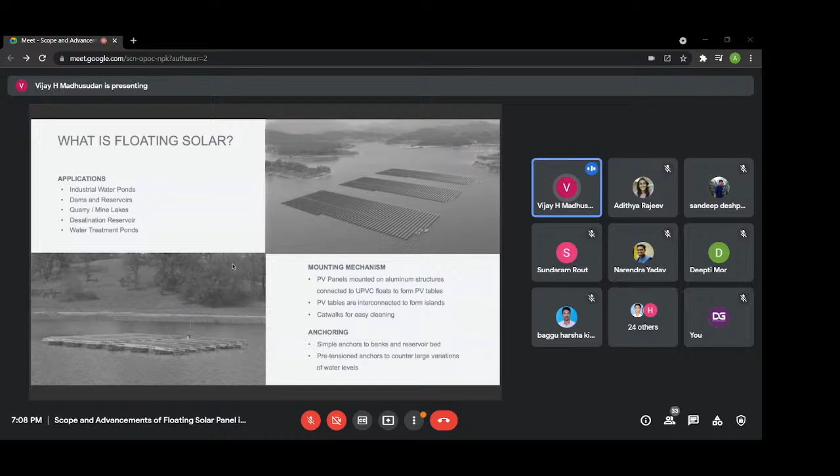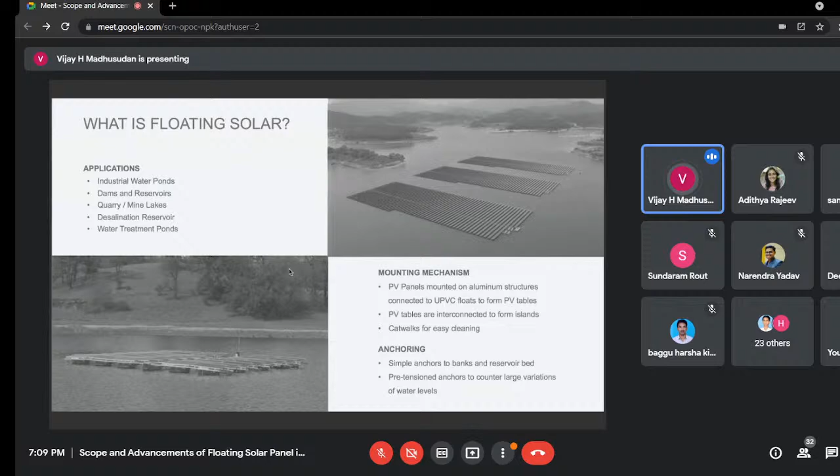So the first fundamental thing that we will understand, and I think most of you would know, is what is floating solar. Floating solar, as the name suggests, is any solar power plant that is installed on water and is floating on it. It's as simple as that. Applications are varied. You can have it installed on industrial water ponds, dams, reservoirs, lakes, water treatment ponds, and a whole lot of them. Right now, people are trying to install floating solar on backwaters in the harbor where you have backwater lagoons, and within coral reefs where you don't have too many waves and tides.

And the primary reason is because two-thirds of our world is covered with water, and people are always running after the little bit of land that they can have, right? With the increasing population, the pressure on land is increasing, which is why we are looking at alternate land neutral technologies for solar. And why solar? Purely because it is a renewable technology, and that is the way forward in trying to make things green.

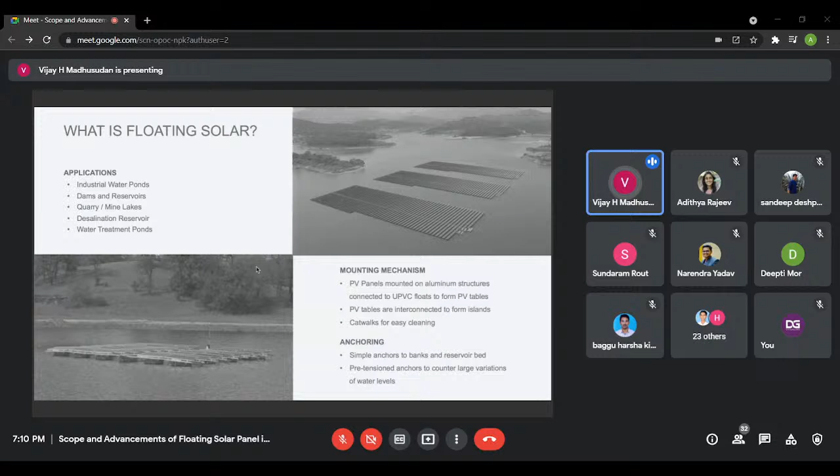So, typically, the advantages of floating solar are a multitude. When you're installing floating solar on raw water ponds or drinking water reservoirs, you have water conservation in the sense of reduced evaporative losses. As I mentioned earlier, it's a land neutral technology. It increases the utilization of unusable space, which is the water surface itself. Typically we design this system for about 25 years. It's fairly low on maintenance because places around water bodies are mostly dust free, and the biggest maintenance on solar panels is cleaning the panels themselves.

Then it is eco-friendly. Most systems today are designed with aluminum, HDPE, UPVC, and other recyclable material that can be recycled after 25 years. It improves your plant utilization and reduces algae growth because it provides a shade cover on the water. And it also provides a low cost energy storage solution, which is one of the most interesting things about floating solar, which I'll tell you about towards the end of the presentation.

A few considerations while doing a floating solar installation: the system should have a low tilt angle, purely because you would not want the system to start drifting because of large wind speeds. Then we need non-slippery systems, so that it is easily accessible and serviceable. Ease of installation is important, and one of the biggest advantages is cooling of the solar panels, which enhances power generation.

So these are predominantly a lot of advantages that's packed in one single solution. So typically the components of floating solar solutions is as in this diagram. So first you have a structure, a floating structure. It can be made in a multiple number of ways, with floats typically on which you have modules installed,

and then this entire island, floating island, is moored and anchored to the bank or the bed of the reservoir or the lake. And then we can have floating inverters on the bank with cables running, either DC or AC power cables running to the substation.

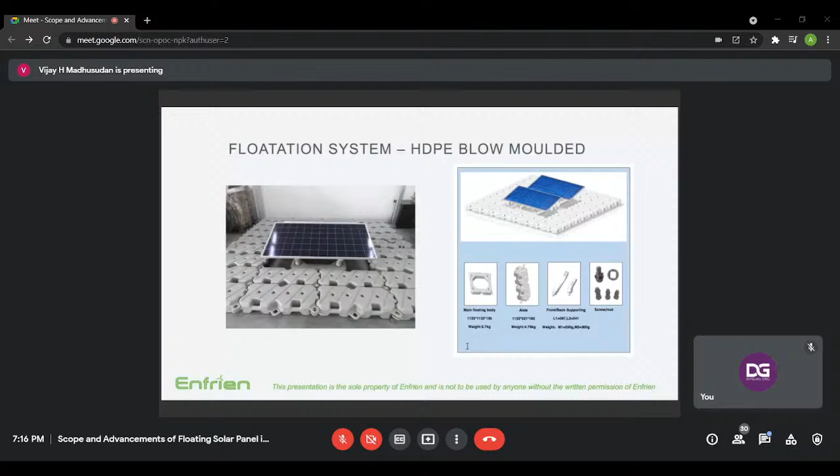So typically, the floating solar system has a main floating body which houses the panel. Clipping mechanism can be different with different manufacturers, and again a buoy which will act as the aisle. The aisles, or catwalks is what I would say, are required for people to actually move on the island and actually service and maintain the system. And again, you have screws and nuts which actually fasten each of these components together.

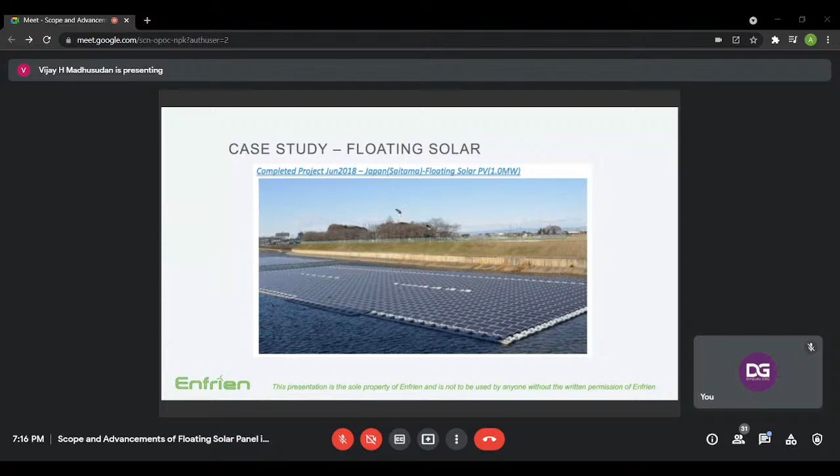So this is one of the projects that they had completed with the same system that I had shown earlier. It's not us, but it's our partners. So this is in Japan, this is in Thailand. So you can also see that cables are actually laid on a floating pontoon that's created over here. And these are all megawatt scale installations that you see.

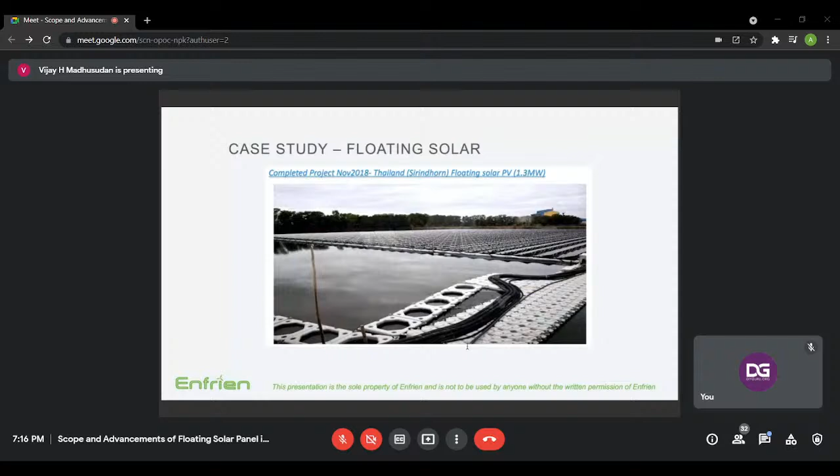So typically we do not advise covering the entire water body with floating solar panels purely because it kills the ecosystem in the water. So we take a maximum of 25% coverage. Then you need to look at the available water levels, at the lowest water level recorded across, let's say, 25 or 30 years, because once the water dries out, you still need the system to be floating.

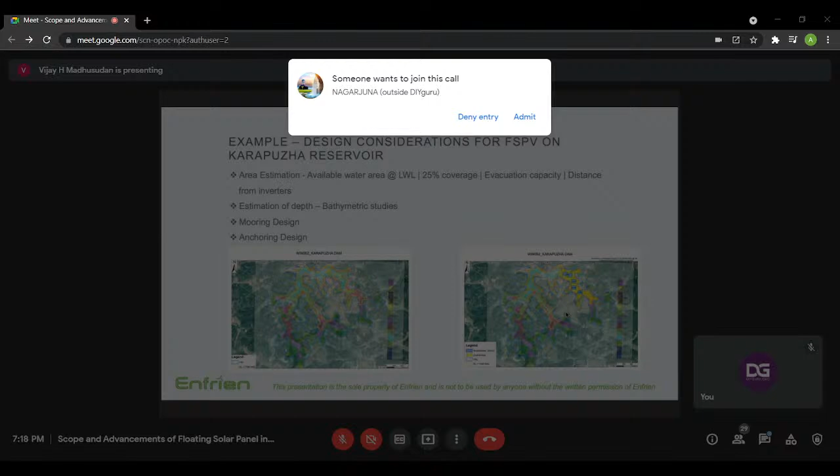Sir, there are some doubts here. Shall I read it now? Yeah, you can. So, Nehim Maskar had asked, will the system affect the river creatures? And I guess you answered it already. And the next is from Adul Kumar. Panels used are mono or poly?

You can use any panel. Typically, my recommendation would be use monocrystalline panels with the highest efficiency, because the mounting cost is extremely high. So a comparison is, let's say, a megawatt of mounting system for ground mount would cost about 20 lakhs upwards, let's say 15 to 25 lakhs, and a megawatt of floating solar system can cost anywhere from 75 lakhs to about a crore and 25 lakhs. So the lesser area the panel has, or the more efficient the panel is, it's better for the project costing itself.

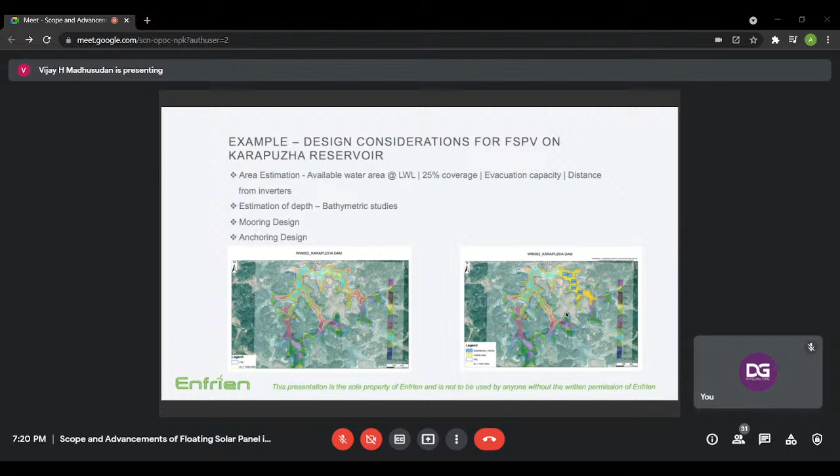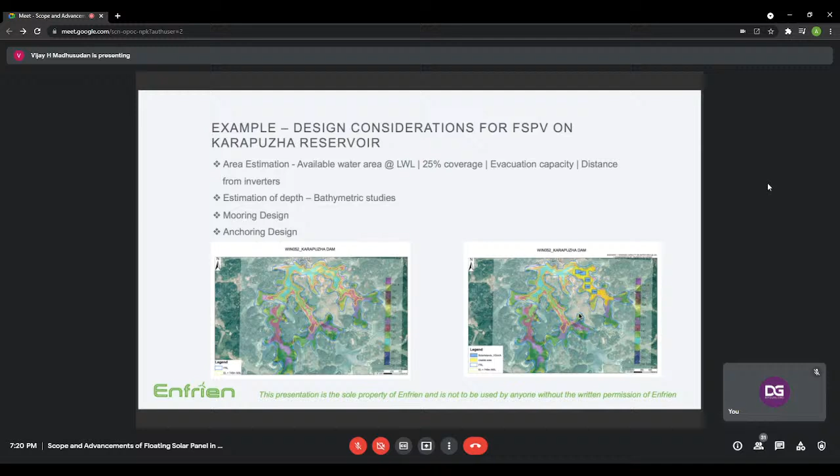Any other questions out there? Yeah, sir, one more is there from Harshit Takral. So, what is mooring and anchoring design? I'll just go to that in the next slide. So basically, mooring is the technology on how you hold the entire island together. So the left image that you see over here, there is a plate which is connected to a chain, which is again finally anchored onto the bank. This is the system that is used to anchor the system.

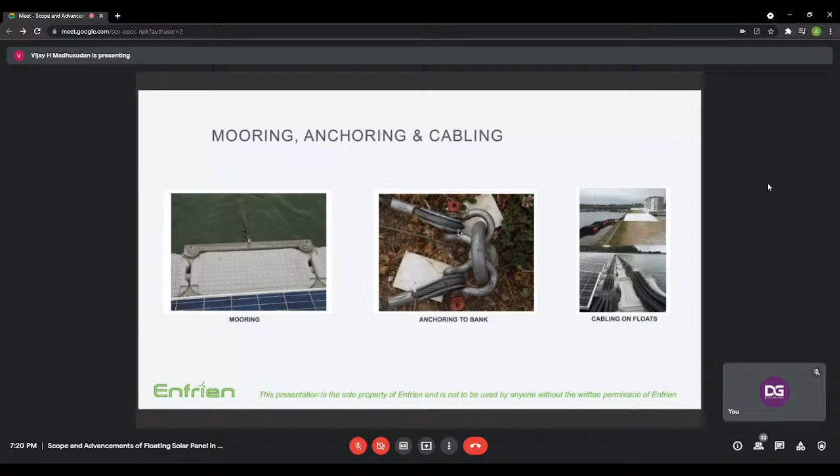These are the hooks and the cables used to anchor the entire island onto the bank. So mooring is typically on how you handle the overall island, and anchoring is to make it stable and connected to the bank. And again, this is cables on floats, which are shown on the right side image. Sorry. Yeah. So this is the technology that we have been developing,

which is Naavi itself. So we started developing this in 2016, and we have had multiple iterations. We started with using HDPE and blow molding itself. Then we realized that it is not proven to last more than 20 years, and in 2016, the oldest system was only 6 years old. So we started evaluating various other options. So we started our design using UPVC, because UPVC is used in the construction industry and it has a life of over 30 years.

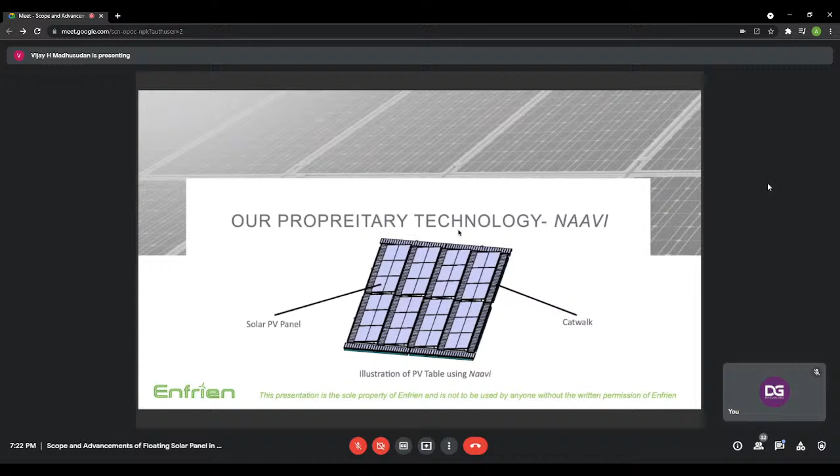UPVC cannot be blow molded. So we have designed a system which can be extruded and welded to create the buoys, the floats itself. So in our system, we have tried to make it modular, keeping the flotation system separate, the structural supporting system, which is made of aluminum, separate, so that you can have your desired angles, and also the catwalks and walkways different. So these are the typical components that we use in our system which we have designed. It's being commercialized. This is something that's been developed for the last 3 years actually.

So quickly, moving to the opportunities in India. The largest project installed till date is 25 megawatts in NTPC Simhadri, I think a couple of months ago. They have done this in association with BHEL, with HDPE blow molded floats. There are a whole lot of projects coming up. The potential in India alone is 280 gigawatts, because we have 18,000 square kilometers of water bodies within India. A few of the larger projects is 150 megawatts in Rihand Dam.

It's an ongoing project taken by, I think, Shapoorji Pallonji at 3.36 rupees per unit, which is still pretty low, but about 30% or 40% higher than a land mount system. And there is a 600 megawatt that is proposed in Omkareshwar Dam in Madhya Pradesh, and 100 megawatt in Ramagundam thermal power plant.

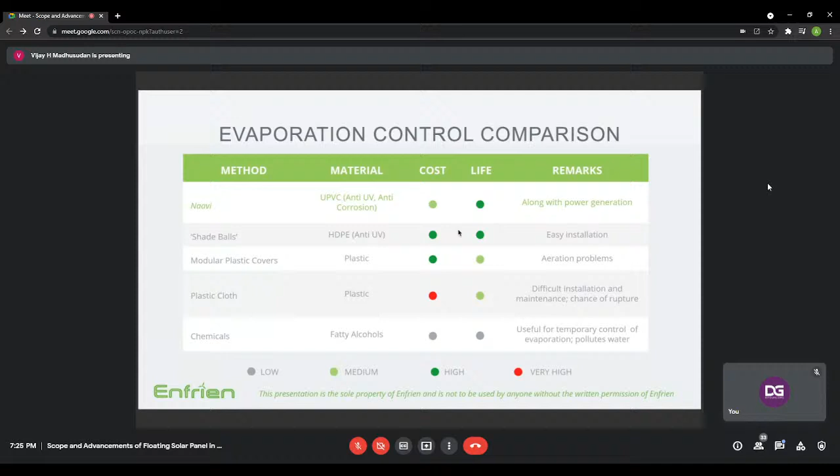So before we move to this, any other questions till now, Madhya? Yes, sir, there is. Narendra Yadav has asked how much power will we get from this, and which particular system will we use this energy to run? I didn't get the second part of the question. I think he is asking on what will we use this power that is harvested from the floating solar system. Okay.

So typically floating solar, to answer the first part, we expect the CUF of the plant to be higher than land mount, purely because of the cooling effect that the water has on the power plant. So typically, let's say a land mount system, we can expect about 16 lakh units a year. This you can increase by at least about 3 to 4%. So it is more efficient in that sense. Which means we can look at about 16 and a half to 17 lakh units a year on floating solar systems.

Now, the second thing is all the floating solar systems are typically going to be large scale systems. So if you're integrating that, it will be integrated with your grid power itself, and it will act like any solar power plant which feeds power into your grid. And if you're looking at floating solar power plants installed in process industries, that will be integrated to the electrical system of the industry itself, like any rooftop system. So there is no change in terms of integration of a floating solar system with other electrical systems. One of the nicer parts.

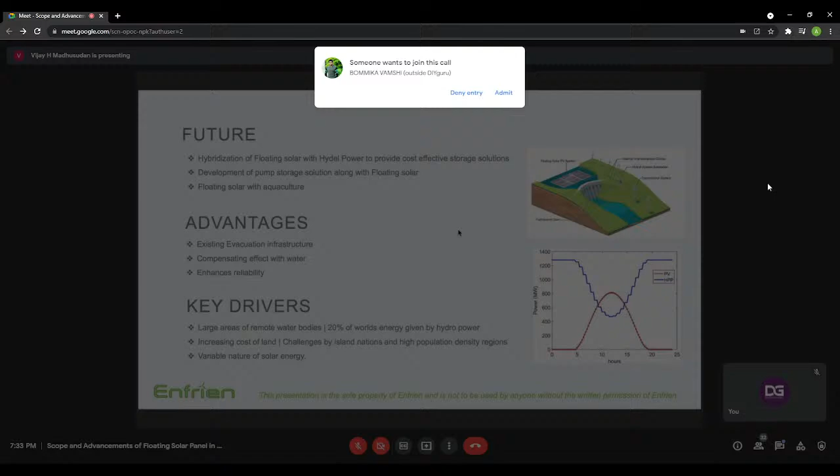The key drivers for this are that you have large areas of remote water bodies, and 20% of the world's energy is given by hydropower. Now, this being a land neutral system, again, I would like to emphasize that you don't have any land acquisition cost, and that can be seen in densely populated areas like Kerala, where people struggle for land, or island nations like Maldives, Mauritius, and other places where land is a very scarce commodity. So floating solar is a boon for all these places.

And the variable nature of solar energy, you can see the graph over here. It generates only between about 6:30 or 7 in the morning to about 5 o'clock in the evening. That can be compensated very well with a hydel power plant, because it's extremely simple to bring down or ramp up the generation capacity in hydel power plants very quickly. It's not true of thermal power plants, so solar might not be a very good hybridization with thermal power plants.

So our simple ideology over here is that whatever energy is generated by the floating solar system can be cut down by the power plant, so that you're storing more water in your reservoir for times when your water levels are low. Today, when the water levels are really low, the power utilities shut down hydel power plants and ramp up thermal power plants.

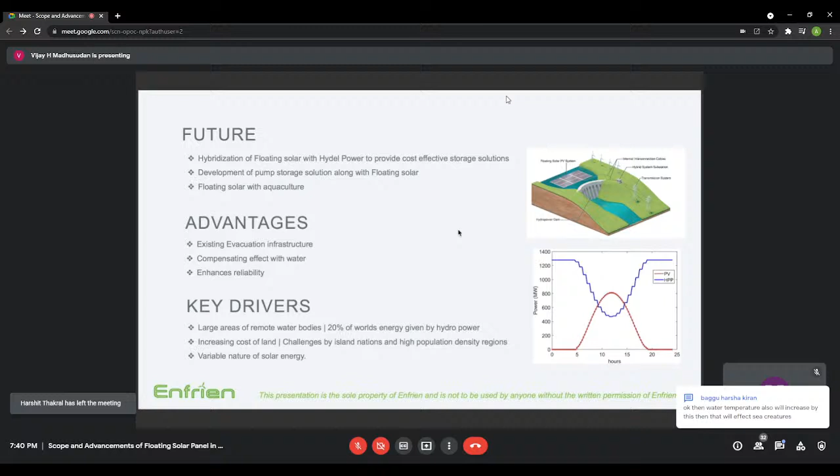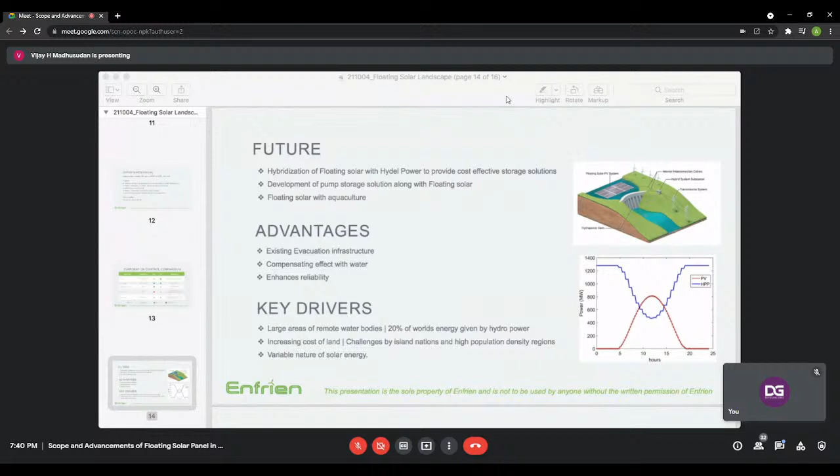Yeah. Okay, thank you, sir. The next is again from Nehan Maskar. How will the maintenance be carried out, because panels will be on the water? Will it be hard to maintain as compared to on land? Actually, I had covered that in the previous slides. Let me just see. So one of the key things is the walkway, or what we call a catwalk. So what you see over here is the place which is accessible for people to actually go and maintain the system.

Now, for reduction in cost, there are companies which are saying they do not want catwalks or walkways so that they save on, let's say, 30-40 lakhs of investment per megawatt. But the downside is, if a panel fails, there is no way to actually change the panel. So it's always a trade-off between your future expected maintenance versus initial capex. So our recommendation is always provide walkways and catwalks so that you can service the system.

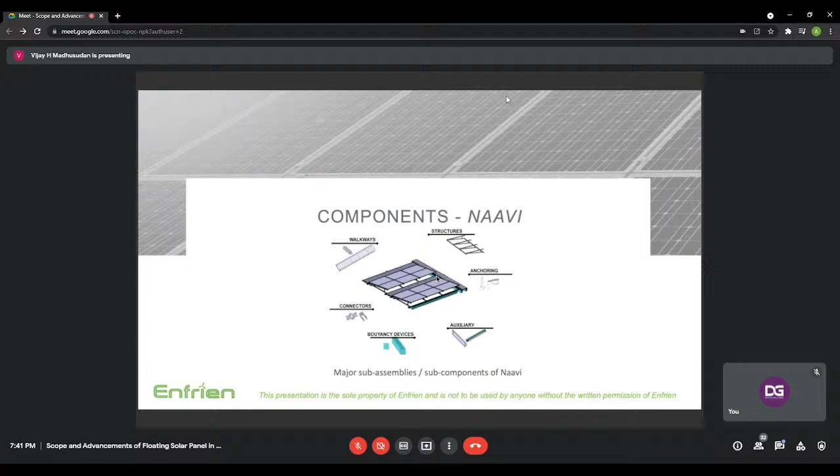And the entire inspiration for our system to use aluminum structures and continuous extruded pipes is so that it is more stable when people walk on it. Probably I'll try to pull out a video of a floating solar installation where you would see that when people are walking on blow molded HDPE buoys, it seems very unstable and unsafe.

Yeah. So Aditya, you can ask the other question. I'll just try to pull out the video. Okay, sir. Thank you, sir.

So the next is from Atul Kumar. I'm working in PV installation. How to get into the floating, and what steps or what other skills are required? So he's into PV installation, right? See, floating solar is just an extension. Today, there are no specific installers for floating solar itself. Whoever is doing it are installers who have already been there on the land mount systems or the rooftop systems.

Now, in terms of upskilling, it is about actually understanding the system so that you can see how the system needs to be installed, and that can be done by contacting manufacturers of the buoys itself, who would probably give you a basic training if there is an installation to be done. Most floating solar companies, considering that this is a new industry, are educating installers to actually install the system.

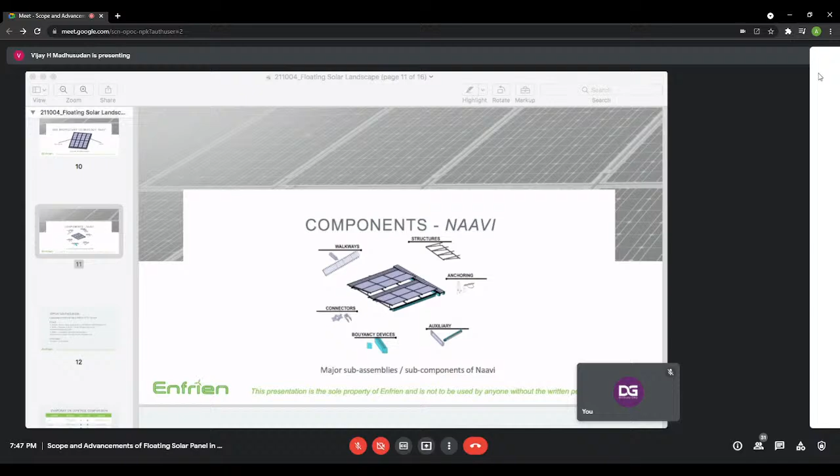And one of the reasons why temperature on land is increasing is because the solar park that I told about is, I think, a couple of gigawatts, which spans across, I think, 15,000 acres or something like that. So there is a variation in albedo effect. You have more solar insolation albedo effect because there is no vegetation at all across the entire land.

So you have more solar insolation being absorbed by the land, which makes it desert-like, right? That is where you have increase in temperatures. Whereas when you have water, most of the heat can be removed with evaporation. Latent heat of water is much higher than the heat that is required to raise the water by a couple of degrees Celsius. So with evaporation, you have most of the heat being removed and the water temperature remains more or less stable. Yeah.

Okay, thank you, sir. Abhinav says, thank you, sir. And for the mounting structures, is any alteration from existing structures in terms of material used required? For example, rusting issues due to humid conditions.

Yeah, so most of the technologies today don't use MS or iron or galvanized iron. They do everything with HDPE itself. We are one of the very few companies who are trying things other than HDPE, where we are looking at UPVC. One of our systems uses HDPE, which is the blow molded system itself. The other one is UPVC with aluminium. So aluminium corrosion can be controlled. So that's not an issue, but we don't use MS or any other highly corrosive materials in a humid environment.

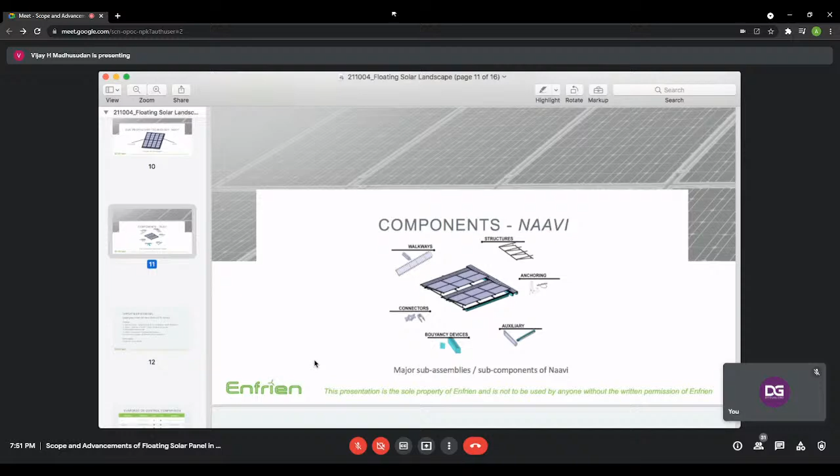Yeah. And typically, to answer your question, if people use trackers, whether single axis or dual axis trackers, most of these tracking systems consume power from the power that is generated within the plant. It's called self consumption. So even if people were to build tracking systems for floating solar, it will be powered by itself. Okay, sir. Thank you, sir.

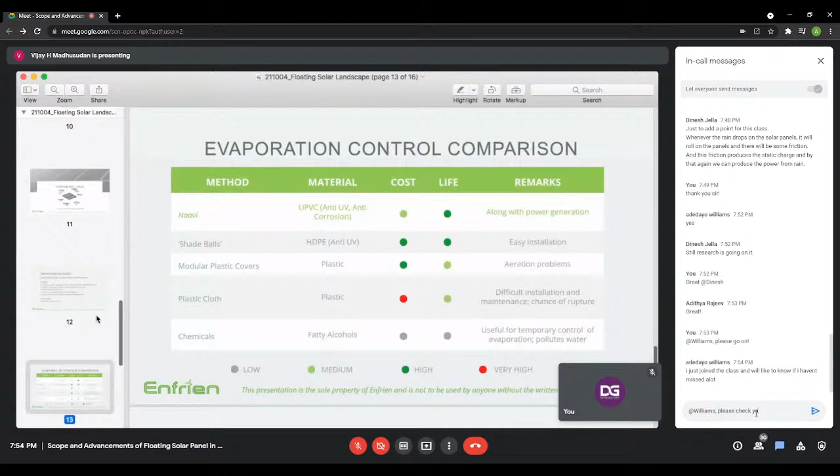Just I want to ask, ma'am, like in India, now the government and all the sectors are moving towards solar. So apart from India, which other countries are giving more importance, and where is the growth of solar increasing?

So Atul, literally every country is focusing on solar right now because it's a renewable source of energy, and the cost of production of solar is under, I think, 3 to 4 cents. So even if you look at one of the hottest regions, which is the Middle East, they are investing heavily. The colder regions, which is Europe or Russia, they have already invested quite a bit on solar. People without land, like Japan, Maldives, and all these places, are investing on solar because they are island nations and they need a sustainable source of energy.

So solar is here to stay, and I would say every country would invest resources and money on this. And sir, in solar there are different sectors: installation is there, your maintenance is there, your designing is there. So for a person who is working in the field, which is the best option for career growth, sir?